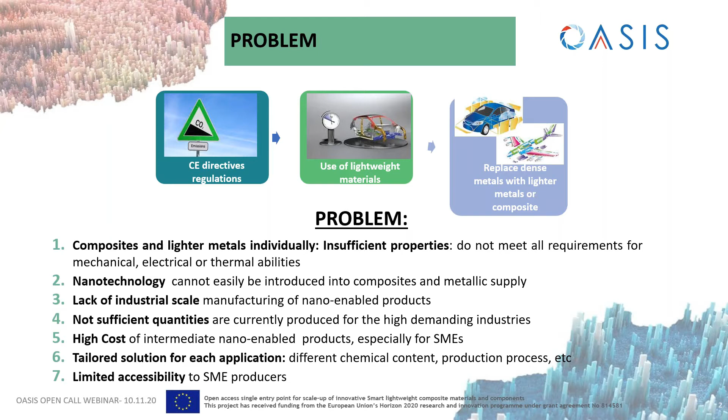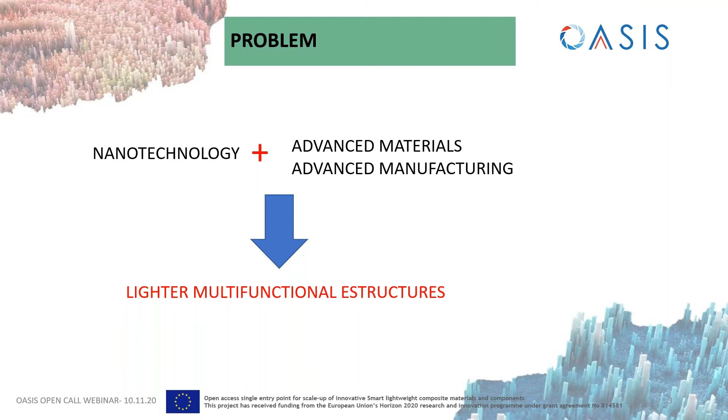Moreover, providing multifunctional products expected by these markets at the right costs is boosting the need for further integration of functional elements in the structure, and at the same time setting up new processes to reduce cycle time and produce net-shape parts. Nanotechnology, combined with other key enabling technologies such as advanced materials and advanced manufacturing, can lead to lighter and multifunctional structures answering major European missions.

The introduction of nanotechnologies in metallic and polymer composites in today's industrialized systems, as part of advanced materials and advanced manufacturing processes in different sectors, depends very much on understanding all basic processes that will contribute to overcome the barriers that materials are currently facing to be introduced in the market. Companies are facing several bottlenecks that should be overcome to access new technologies as a first step prior to the implementation of the manufacturing processes as part of manufacturing plants for a specific product answering clients' requirements.

The introduction of nanotechnologies in a certain part is limited by the need for specialized expertise. Also, investment costs and access to novel techniques are either too high or not a priority for small or large companies, respectively. On the other hand, individual companies or research organizations do not offer facilities and services covering the full development value chain and range of materials, intermediates, and products.

In addition, the development of products based on lightweight, nano-enabled multifunctional materials may require access to finance and an optimized business plan definition based on the prior exploration of economic impacts.

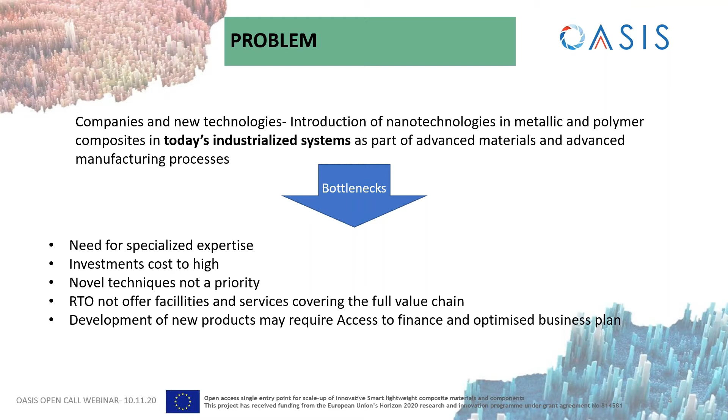So the solution to this is found in the OASIS universe. OASIS gathers 20 companies and organizations from 7 European countries that are cooperating under the roof of OASIS, aiming at developing an advanced manufacturing facilities ecosystem, composed of 12 pilot lines for nano-enabled lightweight materials and associated technological and business support services. So in essence, OASIS aims at developing and organizing a sustainable open innovation testbed for innovative scale-up of smart

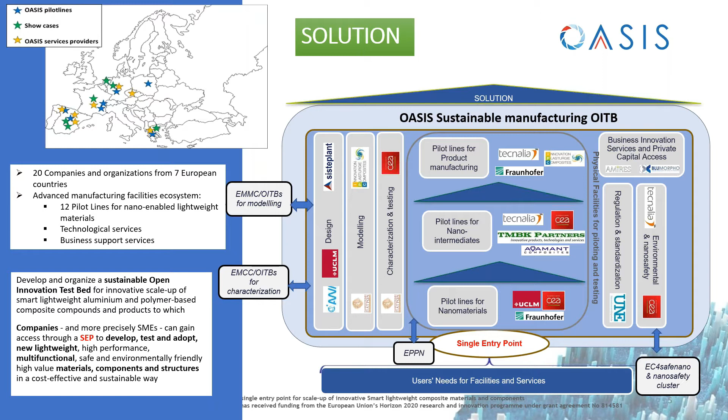lightweight aluminum and polymer-based composite compounds and products, to which companies, and more precisely SMEs, can gain access through a single entry point to develop, test, and adopt new lightweight, high-performance, multifunctional, safe, and environmentally friendly high-value materials, components, and structures in a cost-effective and sustainable way.

So graphically, when a client knocks on the OASIS SEP looking for light and multifunctional structures, the client gains access to a network of facilities and services. The client will find 12 pilot lines operating under a sustainable ecosystem that aims at ensuring a competitive, quality, safe, and environmentally friendly production of nano-enabled products.

The client will also find technical services going from primary concept to final qualification of the products, including material selection, manufacturing processes, product and process design, modeling and simulation, as well as characterization and testing. In addition, specific services related to nanotechnology, such as sustainable manufacturing diagnosis, environmental and nanosafety, safe by design approaches, and also life cycle analysis can also be found.

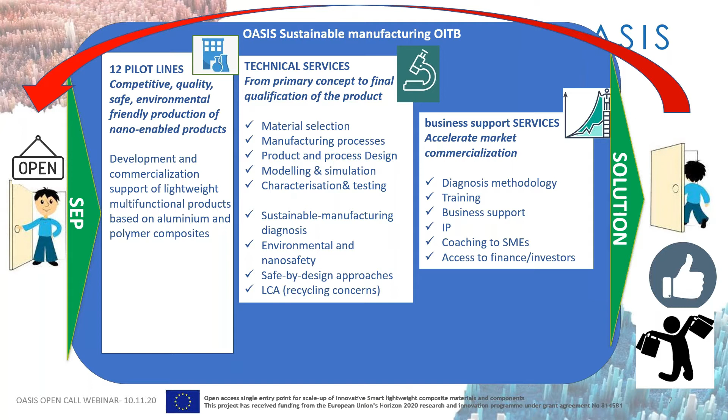The most important thing is the client will probably be back in the future due to the unique combination of products and services OASIS is offering.

One of the strengths of the project is the group of 6 global leaders representing high-impact sectors: mobility, transportation, construction, packaging, and energy, that will implement in real cases the materials and components developed through the 12 pilot lines and associated services. These companies will work on 6 showcases. These companies are OITB clients, knocking on the OASIS single entry point, looking for light and multifunctional structures.

The showcases target specifications that will be reached by 1, 2, 3, or more pilot lines. In terms of products, specific services will be defined and developed for each of the 6 showcases. Several KPIs for the Open Innovation Testbed have been identified and will be validated through the development of the showcases.

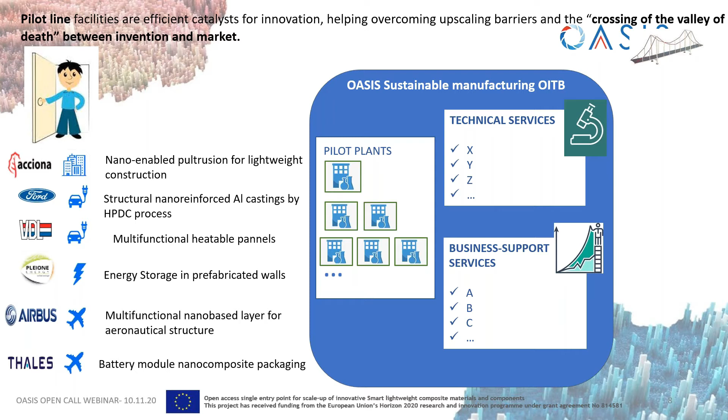The success in reaching showcase specifications, in fulfilling the KPIs for the Open Innovation Testbed, in receiving a positive impact from the companies, will be an indicator for pilot lines offering the right product and associated services. So the 6 global leaders are developing real cases to validate the pilot line and the associated services.

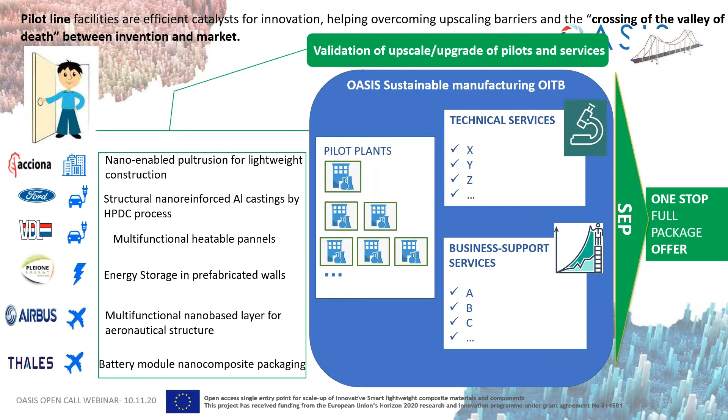The SEP, the single entry point, will then be ready as a one-stop full package offer for the European industry. While the OASIS single entry point is ready, the OITB will be and has been open to the industry through an open call to foster innovation in key industrial sectors and support the development and market uptake of key enabling technologies.

Companies will develop demo cases, will access specific services to develop multifunctional nano-enabled products, and this open call has been open. New SMEs, industries, individuals, academia, and RTOs will be attracted. Demo cases will be developed in the course of 6 months, developing specific demonstrators and also accessing specific services with the aim to develop multifunctional and nano-enabled products.

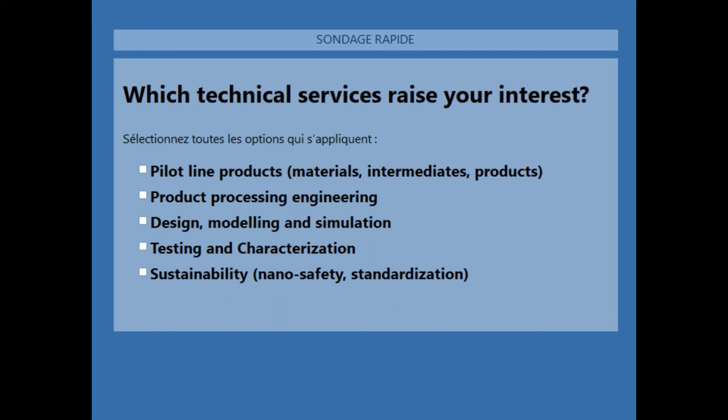So the first one is, which technical services raise your interest? Pilot line products, product processing and engineering, design, modeling and simulation activities, testing and characterization, or sustainability. You can select several answers, and I'll let you some time to answer this poll. I see that less than half of the attendees have answered, so I'll let you some extra time, and I'll close in a few seconds.

I will ask you a second question about the business services. Which business services raise your interest? Business support and coaching, access to private and public funding, or dissemination and marketing activities? Again, you can answer several. I'll give some seconds to answer. I see that people are still answering, and I will close it now.

So now that you got a brief introduction of the OASIS project and its activities and how it works, Roman will present you how you can apply and what you need to apply to this opportunity. So Roman, the floor is yours. I will give you the control.

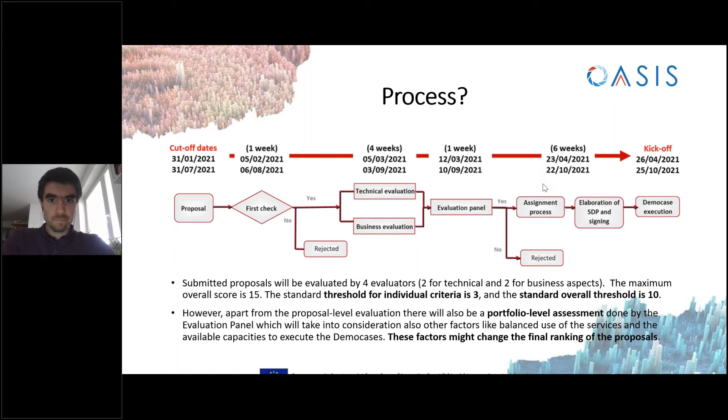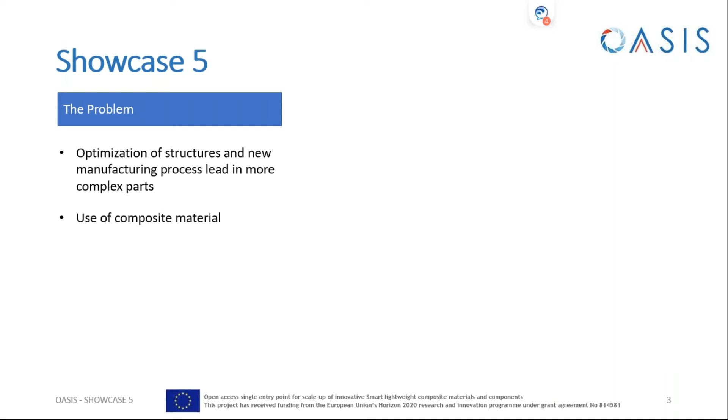About Showcase 5: nowadays we can optimize our structures, and we have a lot of new manufacturing processes that allow us to produce more and more complex parts. And of course, we use a lot of composite materials due to the advantages these materials have in comparison with metallic materials.

For instance, this is section 19 of the A350 - a fuselage section installed at the rear end of the aircraft. This is a composite part, full barrel, with omega stringers, reinforced with frames. As you can see, it's a fuselage panel, but this section also has double curvature, which sometimes makes it difficult to repair due to the shapes. This is why we have to focus on how to repair this type of structure.

This applies both for production, but also in some cases when we have manufacturing issues, but also when we have accidental damage during service.

For this type of repair, we have to focus on 3 main aspects. First is weight, because in the aeronautical industry we have a lot of issues with weight - the more weight, the more consumption of our aircraft. We also have to take care of customer satisfaction, because if we apply a bolted repair, this type of repair needs bolts, and the bolts are visible to the customer, so in some cases it's not nice to have this type of repair. And of course, we have to take care of energy consumption.

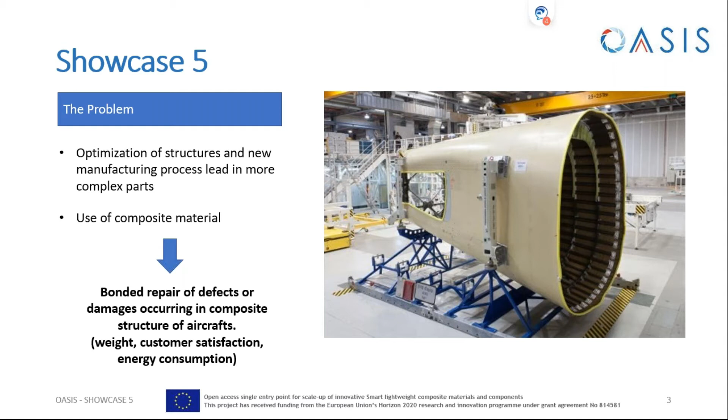So the state of the art allows us to repair this part, and we have two main options: the first is local heating, and the second is to heat up the complete part of the aircraft.

In the case of local heating systems, in some cases they are not flexible enough to cure properly the composite material, for instance the thermal blanket, or in some cases this type of heating cannot be used in 100% of the surface of our structure, for instance the hot air boxes.

And if we use complete composite part curing, we have to take care because it could damage the part, and also it makes the repair costly, because we have to heat up the complete part instead of a small area.

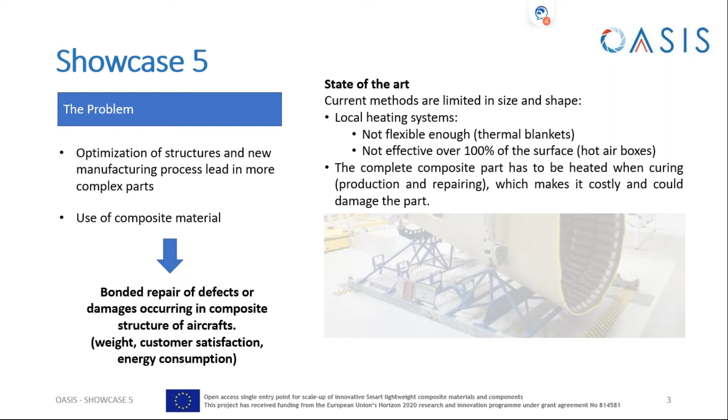So what we are looking for is something that could help us with this type of repair, and what we have to fulfill are some technical requirements.

In terms of processing, we have to fulfill our curing cycles, so 180 degrees with their tolerances, heating rate, and also we have to cure our materials at high pressure, so between 3 or 7 bars of pressure.

And in case this heating system is integrated in the structure, we have to take care of the system weight, and then this system cannot weigh more than 100 grams per square meter.

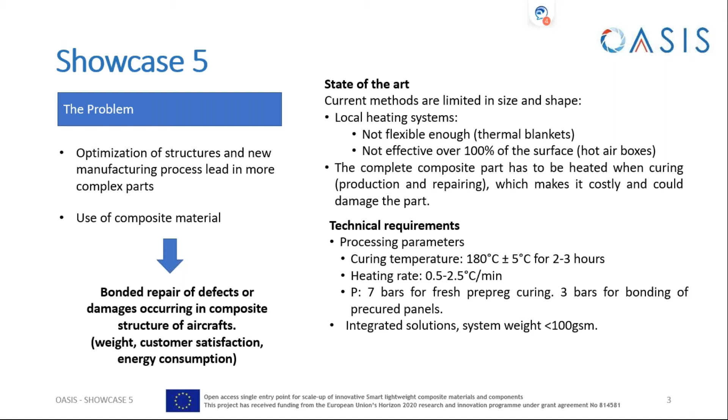So what we are asking of Showcase 5 and the OASIS project is an out-of-autoclave composite curing process using a resistive heating sheet that is flexible enough to be adapted to simple and also complex panels, fulfilling the standard epoxy cure material cycles.

This heating system can be integrated or not in our structure, but in case it is integrated, we have to find an application, for instance structural health monitoring.

So the main objectives will be to cure composite materials during production or during repair or even in service, with a flexible heating system to avoid the complete heat up of the part. And also, if it is integrated, we will want to find a structural health monitoring system to be used.

In the showcase, we are focused on two different solutions: the external heating system. In this case, we will use a heater, apply the cure cycle, and then remove it.

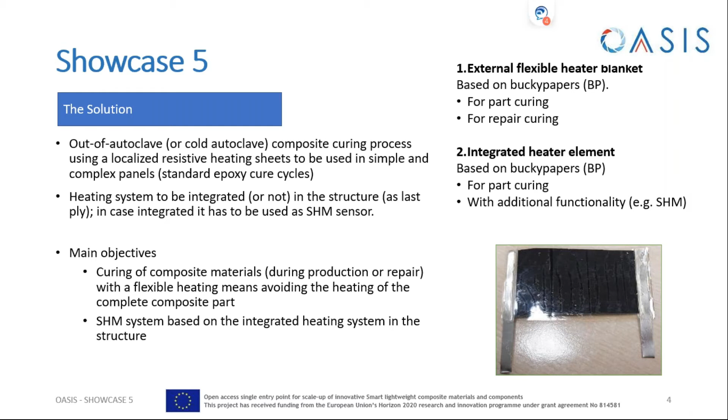In this showcase, we have four partners: University of Patras, Adamant, TMBK, and also Tecnalia, and all of them are working to develop these two solutions.

Tecnalia is providing the bucky paper, performing the integration of the material, and they will perform all the trials that we need to assure that the heater is properly working.

Adamant will help us develop the integrated solution. They are trying to modify the bucky paper in such a manner that we can integrate it in our structure with no drawbacks in weight, while also being compatible with all our requirements.

And TMBK is working on the development of the external heating system with different materials.

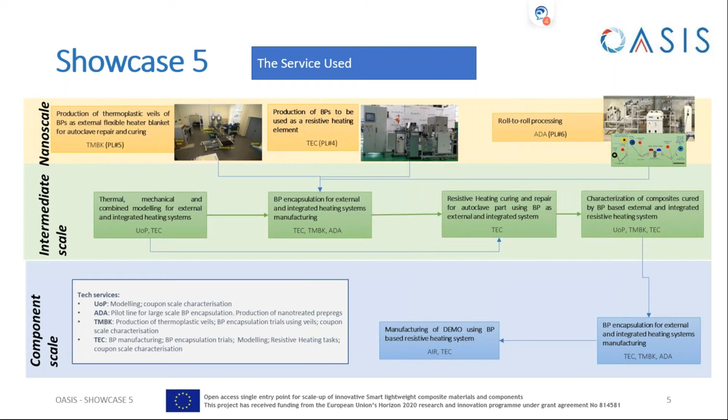And yes, this is all for me. Thank you very much for your attention.

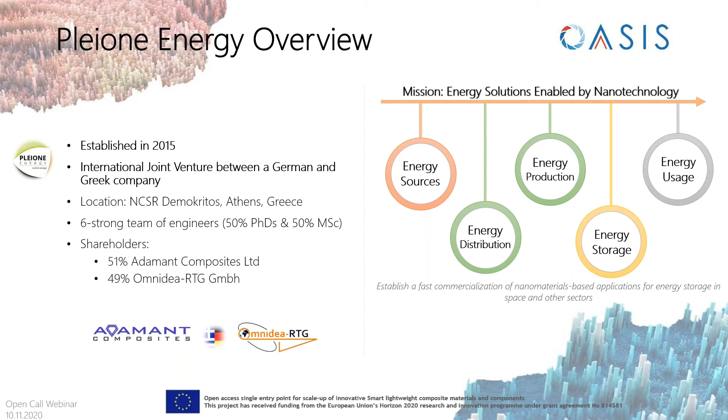Our activities involve R&D to explore the potential of graphene and other nanomaterials on current and future energy storage technologies, as well as product development to introduce innovative products in focused markets, such as space and green buildings, enabling further the energy transformation. We participate in OASIS as the end user of Showcase 6 to further develop our novel energy storage solutions for the building sector.

The aim of this showcase is the development of a sound-absorbing, prefabricated, lightweight panel with integrated energy storage capabilities and advanced functionalities in terms of environmental sensing and safety. The main objective is to widen the use of nanotechnology and composites in the building sector by designing energy-efficient products with enhanced performance.

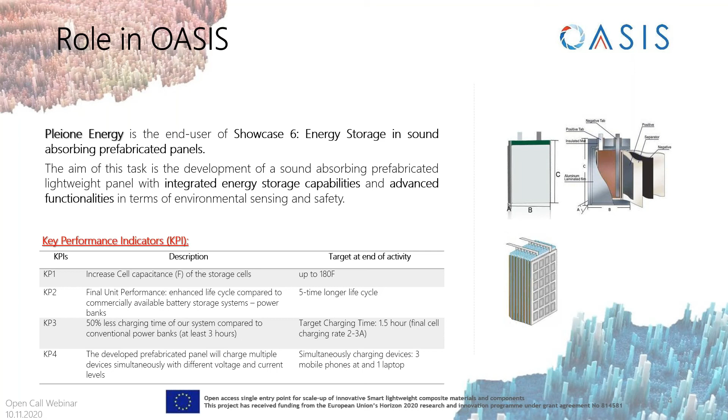But why develop advanced supercapacitor energy storage systems? The main problem is that commercially available storage devices like power banks use poor quality batteries to charge electrical devices, which ruins their health and life cycle and destroys the end user experience. This is mainly because of unreliable batteries. Advanced lithium-based systems provide high energy density but with increased degradation, leading to an operational life of no more than 2,000 cycles. Moreover, they are not environmentally friendly and have a low charging rate.

Supercapacitors are considered one of the potential candidates in the domain of energy storage devices for the forthcoming generation. So what we propose is the development of a prefabricated panel with integrated Bucky paper-based energy storage cells. Bucky papers can provide essential improvement potentials for the development of these systems. The innovative step is the combination of composites with novel energy storage materials into a durable, high-performance, and cost-effective product.

Our product can not only reduce the general noise within enclosed areas, but also charge electrical devices like phones and tablets. Thus, the product will be ideal in a variety of spaces, including offices, libraries, hotels, conference rooms, exhibition areas, and others. The final proposed product will have 10,000 operation cycles, and it can charge faster, up to 1.5 hours, than a typical battery power bank that needs at least 3 hours for a full charge.

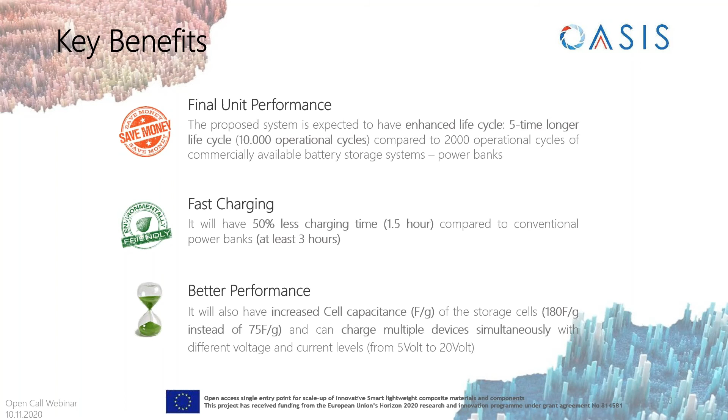Moreover, it will charge high-power devices like laptops and can charge multiple devices simultaneously with different voltage and current levels.

Now, towards product development, four pilot lines of OASIS are involved, covering all the different parts and materials needed to deliver the final product proposed by Pleione.

Tecnalia, using its pilot line, developed and provided tailorable Bucky paper electrodes with improved capacitance to meet the specific requirements of our showcase.

Pilot line 6 of Adamant will be used for the development of prefabricated lightweight panels based on eco-friendly composite materials, and the integration of additional functionalities in the selected prepregs.

Also, flame-retardant nanoparticles are developed by pilot line 3 of Fraunhofer for integration in the prefabricated panel to achieve safe energy storage performance.

Moreover, sheet-to-sheet printing devices from CEA are planned to be utilized in order for smart printing sensors to be integrated in the prefabricated panel, adding functionalities that will enhance the end-user experience.

Now, Pleione Energy is the leader of the showcase and also developed the final supercapacitor cells.

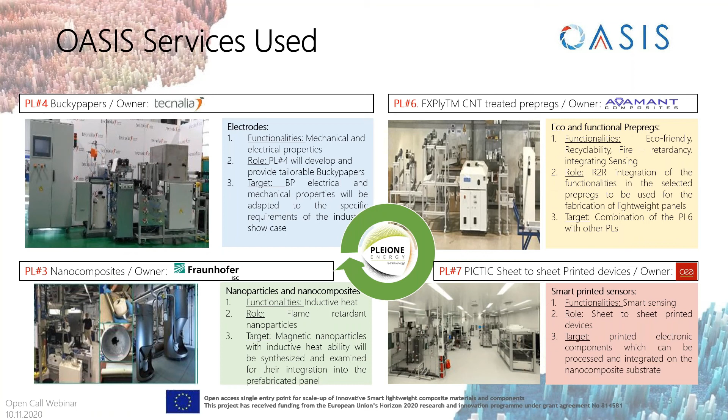The reference Bucky paper electrode performs as well as standard carbon black electrode, but the main goal is to improve the performance of the Bucky papers to outperform materials already on the market.

To this end, several manufacturing routes have been made by Tecnalia to develop customized Bucky papers.

Tecnalia worked on different scenarios of materials, from reference Bucky papers to hybrid formulation Bucky papers with different weight fractions of metal oxides. Moreover, Tecnalia studied different bath concentrations and deposition times, since apart from the metal oxide content, deposition time appears to be critical.

As can be seen from the diagram on the right, the optimum deposition time appears to be 15 hours, since it develops a Bucky paper electrode with initial capacitance above the target level.

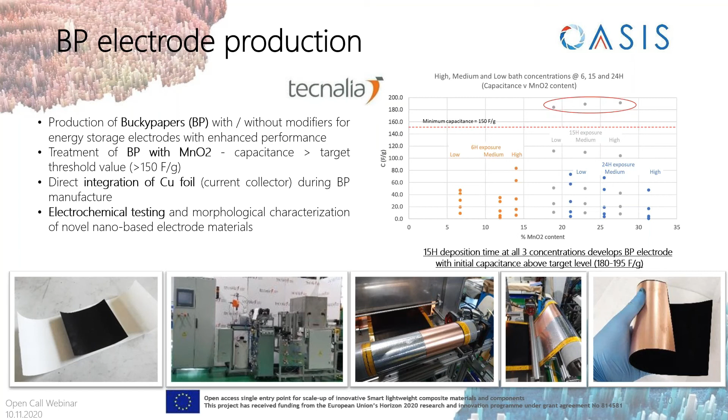So up to now, a 30% increase in capacitance has been achieved, which corresponds to 180 farad per gram.

Pleione, together with Tecnalia, have also investigated various substrates for the transformation of Bucky papers into self-standing electrodes, starting from conventional copper foils, aluminum foils, and other metallic foils.

Also, different electrolytes and current collectors have been investigated for the manufacturing of the supercapacitor cells.

Based on the results, we have concluded on pouch cells with Bucky papers made on copper foil and organic electrolyte. Towards supercapacitor cell development, several development routes have also been performed with the main aim to enhance the life cycle.

Small pouch cells with one pair of electrodes have been developed and have reached up to now 1,000 operation cycles.

The results have been shared with all involved partners to be studied, so as to identify the next steps to further develop the final solution and reach the targeted operation cycles.

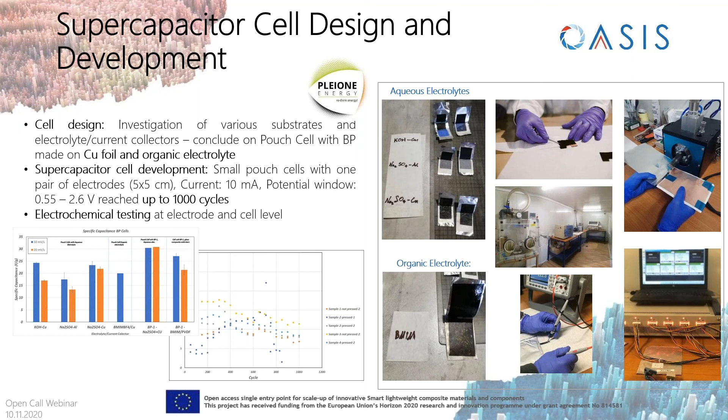In parallel, Adamant worked on panel dimension and architecture options for the final product, as well as on the process design for the prefabricated panel production.

Materials based on eco-friendly and recyclable composites have also been selected for manufacturing the panel, which will be the casing of our Bucky paper-based energy storage system.

Fire-retardant prepregs for the panel's face sheet have been selected. Inside the panel will be a thermoplastic honeycomb sandwich core. The panel will be covered with a layer of sound-absorbing mat on each side, and can also be covered with a fabric to complete the process.

The material selection and construction method provide strength in tension and fire resistance. And because we need our product to be somewhat rigid yet lightweight, using the thermoplastic honeycomb core is the perfect material choice.

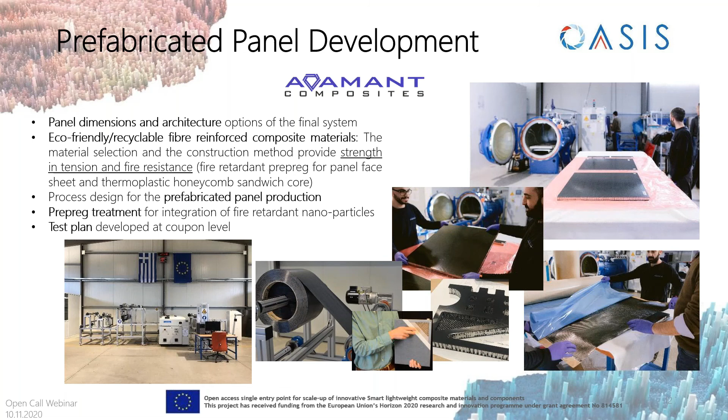Moreover, magnetic nanoparticles with inductive heatability will be synthesized by Fraunhofer. The aim is to further increase the flame retardancy property of the composite materials by integrating them into the prefabricated panel produced by Adamant.

Further functionalities in terms of electronics and sensing of environmental conditions will also be added to the final product.

CEA will provide us with sheet to sheet smart printed sensors, which can be processed and integrated onto the nanocomposite substrate.

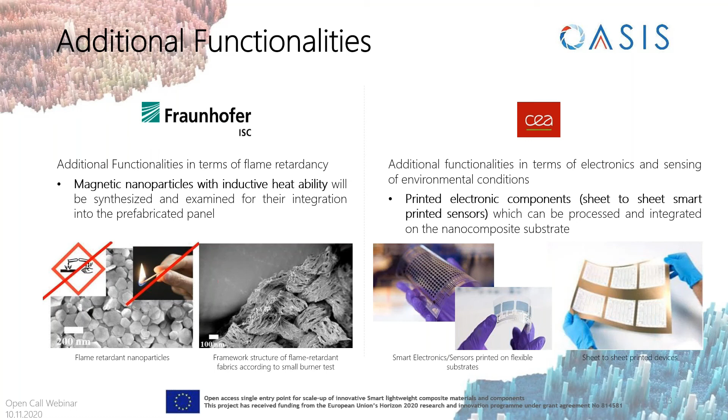So after the completion of our product through OASIS, Pleon targets to replace conventional battery-based power banks with supercapacitor technology and grow our business by expanding into a new market.

The unique selling points of our final product are the use of fast charge technology through the use of Bucky papers. The Bucky paper-based supercapacitor power bank will have a very low charging time, 50% faster than a typical battery power bank.

The product can also be tailored to customer requirements and specifications, so all finishes and dimensions of the panel can be designed according to their budget and application.

All materials used are eco-friendly and safe, convenient alternatives for the built environment.

Finally, the sound-absorbing panel can provide additional environmental sensing functionalities to the end user.

So whether you are a startup, an SME like we are, or a big company that needs to further develop, scale up, or optimize its product, one of the biggest benefits of attending the OASIS project is the opportunity it gives you to de-risk before full production, which is very important. You have access to unique facilities of 12 nanotechnology manufacturing pilot lines without high capital investment.

It can also provide you high-level and reliable nano-based solutions and services that best match your exact needs. The services provided can cover the whole development chain. Moreover, you will benefit from collaborating with leading research organizations, a number of innovative technology suppliers, and recognized experts in business development.